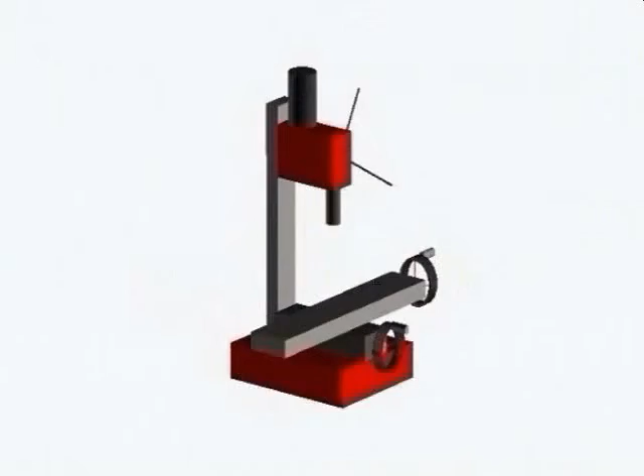The mini mill is really a very simple machine made up of a base, column, and head. The mill head attaches to the column and contains, among other things, the gearbox, the motor, and the spindle. The spindle is the rotating shaft that your milling tools will be attached to.

Attached to the base is the mill table, also known as a compound table. The upper portion of this table has slots cut into it which will accept T-shaped anchoring nuts. This is known as the bed, where we'll mount our work or various vices or fixtures if we need to hold our work in some special manner.

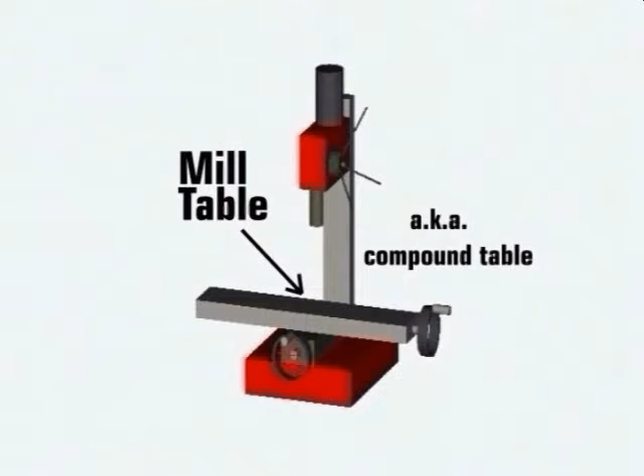This compound table is able to move in two different directions or axes. The amount of movement is controlled by the hand wheels. Each hand wheel has a movable collar which rotates with the hand wheel, but it can be reset to any starting position we might require.

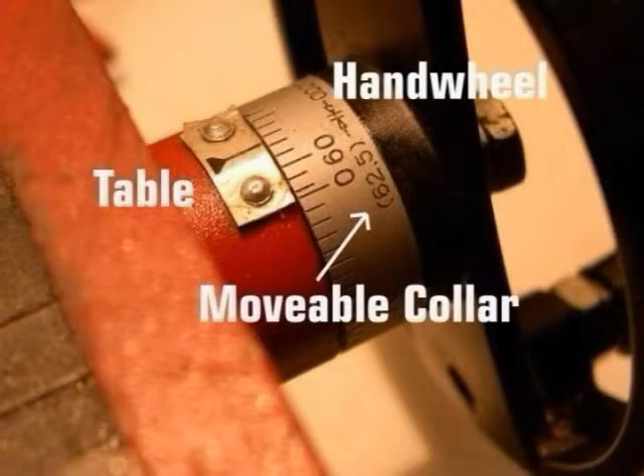The collars are inscribed with tick marks. Each of these tick marks is the equivalent of a thousandth of an inch table travel on its corresponding axis. You may have noticed in the picture, or on your own mill if you have one like this, that the tick marks add up to just a touch over 62.

That's because each turn of the hand wheel moves the table on its corresponding axis 62 and a half thousandths of an inch, or 0.0625. While this may seem a little unwieldy at first, you'll quickly find that for most common inch measurements it works out very nicely. We'll do more on that later.

The last thing in this picture I'd like you to notice is the witness mark, and that's the mark you align your tick marks against when you make your measurements.

Now let's name and demonstrate the basic mill axes and how we move along them. As we mentioned, the main table of our mill can move in two different directions on two different axes. The first is the x-axis, which is left to right movement as we face the machine. This is controlled by the right side hand wheel.

The other axis that our table moves on is the y-axis. This is front to back movement as we face the machine. Much like the Etch-a-Sketch toys you may remember from childhood, by using these two axes we can position any point on our workpiece under the mill spindle.

But we still need a third dimension, that of depth. That third axis, the z-axis, comes from movement of the mill head on the column. We're able to raise and lower the spindle in relation to the mill table in much the manner of a drill press. As the animation shows, that can be done with a hand wheel that's on the side of the mill head. But that only gives us coarse control of movement on the z-axis.

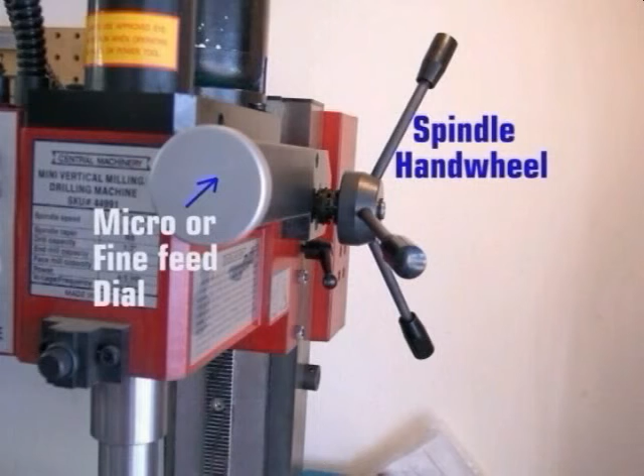We're looking for precision movements. We can measure in thousandths of an inch. So besides a coarse feed hand wheel, we also have a micro feed or fine feed dial on the front of our mill head. We can use the hand wheel when we're using the mill as a drill press and for other large movements of the spindle.

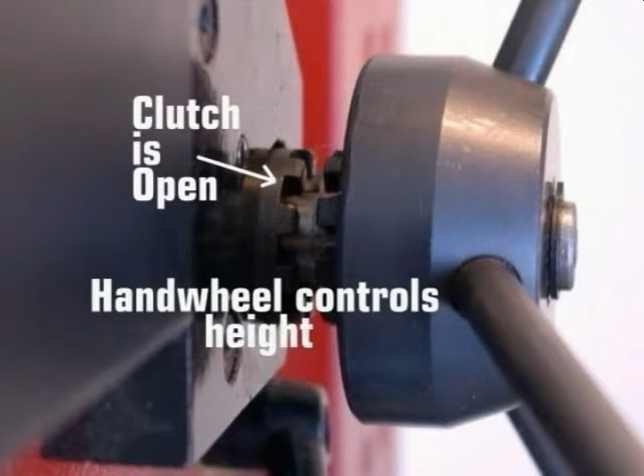But when we want precision, we engage the micro feed dial. You can see that between the mill head and the hand wheel there are two castellated or square-toothed rings. These act as a simple clutch to engage or disengage the micro feed dial.

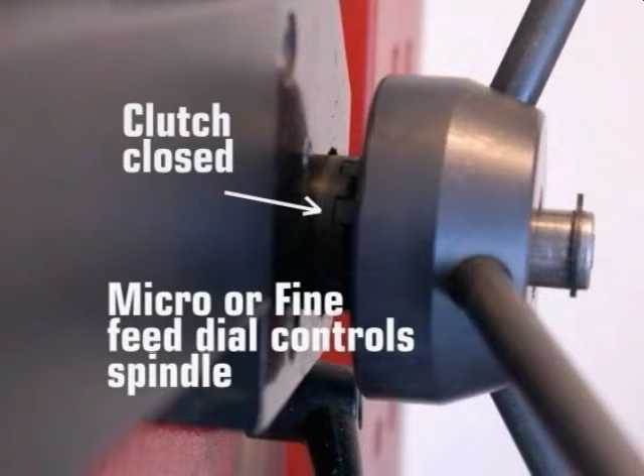When apart, as in the picture, the hand wheel will move the spindle head as desired. But when the hand wheel is moved inboard towards the mill head, the two rings can lock together. When this happens, spindle movement is now handled by the micro feed dial, and with some care can be controlled very precisely.

A look at the side of our micro feed dial shows us that it too has a movable collar, graduated in tick marks that also represent a thousandth of an inch. You probably noticed, though, that this dial ends precisely at 60 thousandths. This is important to keep in mind when we get to the calculating portion of our presentations, and we're trying to figure out how many turns of any particular hand wheel or dial we need to locate our work in relation to the spindle.

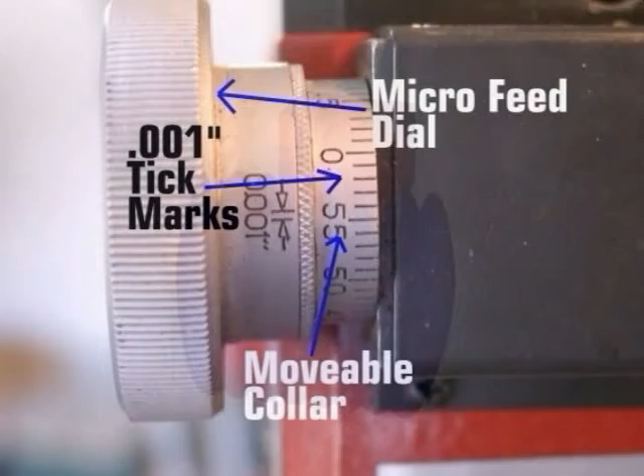Since we've mentioned calculations and measurements, this might be a good time to bring up a factor we need to be aware of when using mini mills, lathes, or any precision mechanical equipment. It's called backlash. Mechanical parts, such as gears and screws, do not mesh with each other perfectly. They need to have a small amount of clearance or play between them.

Take a look at the drawing on your screen. The screw represents a cross-section of the screw that runs through the x-axis of your mill, and the red portion represents a cross-section of the nut that attaches it to the mill table. In this drawing, they're meshed perfectly, with no space between them whatsoever. So if the screw turns and exerts pressure on the nut, it's going to follow without any hesitation or lagging.

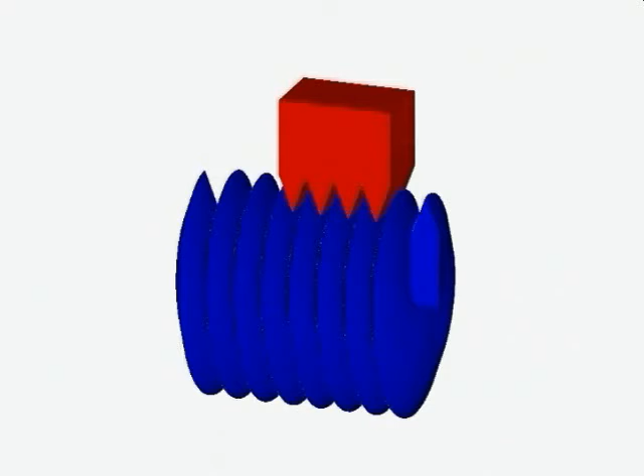That'd be nice, but in the real world it doesn't work like an animation. There has to be some space between the parts, or friction would make it impossible for them to move at all. Not only is there play designed into the parts, but wear and tear will also take their toll, adding additional clearance between the parts as time goes on.

That presents a problem, because that's what causes serious backlash. As the screw begins to travel, it has to close that gap before it actually contacts the nut and begins to move the table. And if you back the screw off, it again has to cover that distance in reverse before causing any actual movement of the mill table. All of this play in the system can wreak havoc on your accuracy.

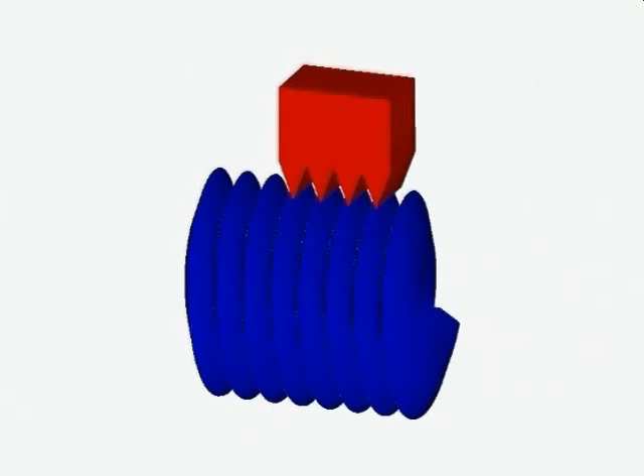You can make some adjustments on your lathes and mills to remove some of the backlash. We'll cover those in later installments, but you can't get rid of it altogether. If you hold tolerances too tight, the friction will make it impossible to turn the hand wheels. So you learn to deal with it by making all of your cuts in one direction.

I've adjusted my mill with a little extra play to provide an example. Suppose I'm trying to locate the spindle on the 15 thousandths mark, and I just dial right past it. Now if I turn the hand wheel back to 15 thousandths, it won't move the table at all. The wheel merely flops around.

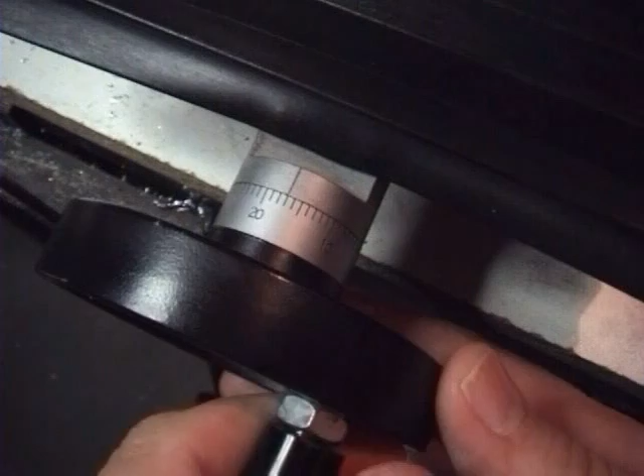Instead, I need to back the hand wheel off at least a whole turn to get past the backlash. Then I can come forward again until I reach my desired measurement. If I do it that way, it'll remove the backlash from the equation and keep the placement very accurate.

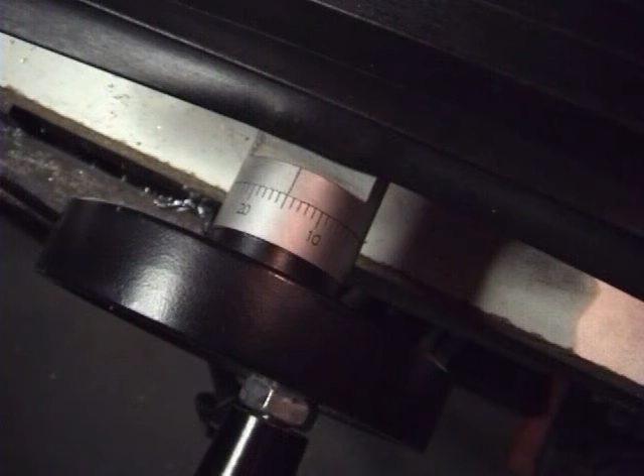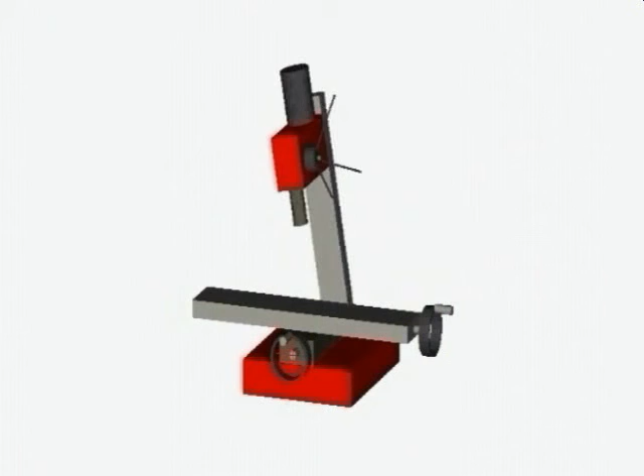Going back to our animation, we have one more movement available on our mini mills. To cut angles in our workpiece, we can swing the head of the mill to either side around 45 degrees each way. This is a very useful feature, but most of the time we're going to try to avoid using it. The reason is, whenever we move the mill head out of alignment, we have to reset it back, and we have to do that very precisely.

This process is called tramming the mill, and while it's not terribly hard, it is a little time consuming. So whenever possible, we'll try to avoid this. To do this, there are different types of vices, tables, and fixtures that will allow us to select angles for our workpiece while still leaving our mills in normal alignment.

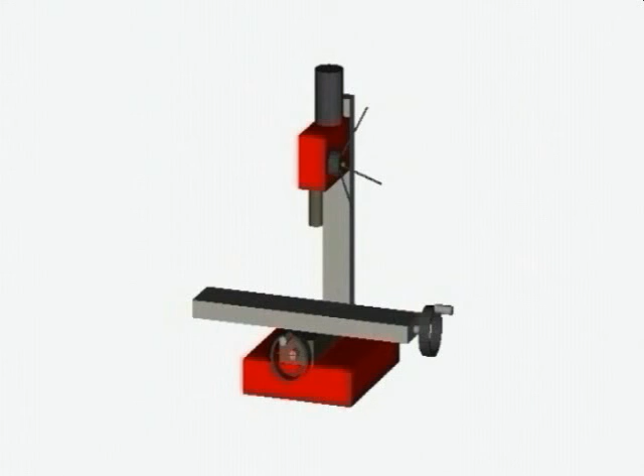If you're new to the hobby, you've just covered a good bit of material, but as I'm sure you found, it really wasn't very complicated or intimidating. We'll be using these terms throughout this as well as the other presentations in this series. So if you feel you missed something, a quick review wouldn't be a bad idea. That's a nice thing about DVDs and VHS tapes—they're really very patient.

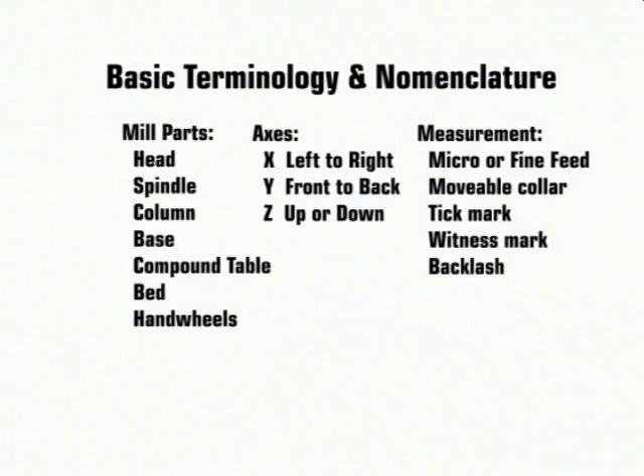When you're ready, we'll go ahead and take a look at some of the tools and accessories that we'll use when clamping our work.